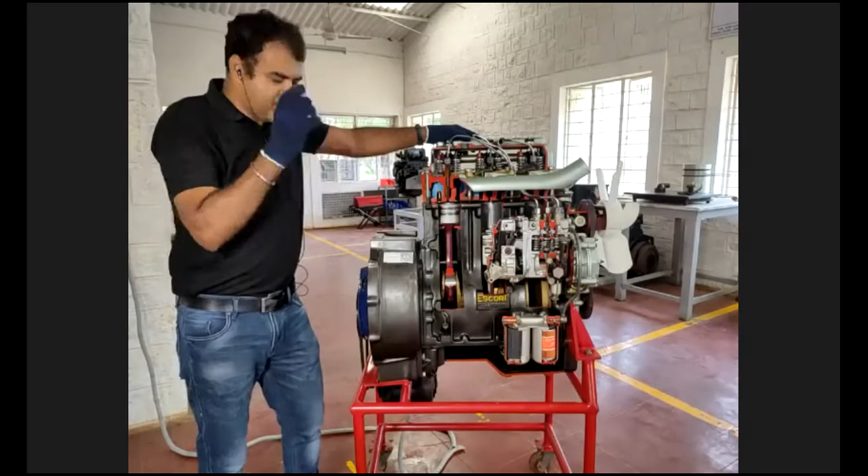Talking about this fuel injection system, this is direct injection, so this is a DI engine. Talking about the fuel system, this is inline fuel system, right? By cooling system, it is water cooled, right? By liner type, it has a wet liner system here. If we talk from top to bottom, there are different parts assembled here: cover, cylinder assembly, okay? Cylinder block is the crankcase area. Here the crankcase and cylinder are an integrated part. The bottom area we call the oil sump, right?

So at the same time, cooling of this engine is water cooled, as I already told. So have you heard the firing order of this engine? Okay, can anyone type in the chat box what is the firing order of this engine, a 3-cylinder engine, as per your knowledge?

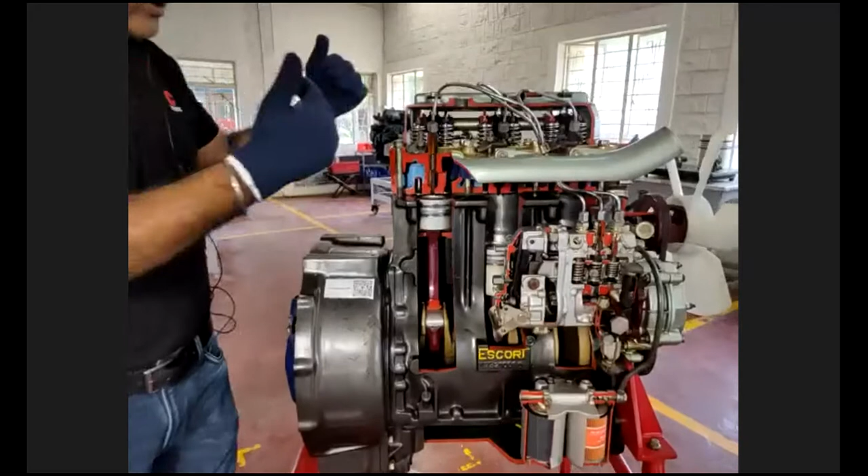We have started getting the responses, Umesh. Ankit has displayed his answer.

1342. Oh, this is a 3 cylinder engine. So there is one more chance for Ankit to correct himself, since this is a 3-cylinder engine. Then you can reply accordingly, Ankit. It's open to others as well, Badal, Sumit, and all our friends in the line. What is the firing order of this particular engine? You feel it's a 3-cylinder engine.

Yes, by seeing these nozzle injectors, you can identify this is a 3 cylinder. We got some more responses, Umesh. From Ankit Kumar, it is 123. From Pavita, it is 132. Okay, others also can try. It's for everyone, not only for 2 or 3 people. Surjit says 132, Vivek says 132. What about others? Be the quick finger, give your responses. Shankar Rajput says 132, Atul is telling it's 132. Thanks guys, thanks for the responses.

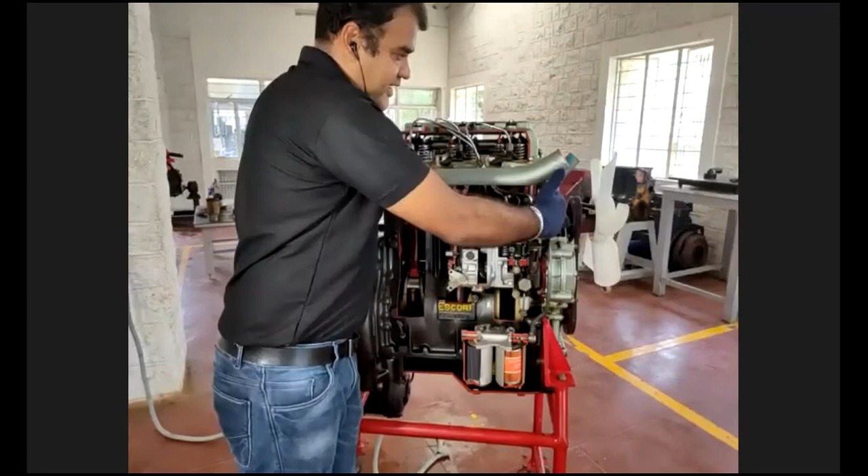Umesh, over to you. Okay, so normally a 3 cylinder engine has a 132 firing order; 321 is also there, and 123 also is there. But in front of us, this engine's firing order is 123. This is also available in the market, right? So we are calling this the 123 cylinder from the front side. As manufacturers, normally we say 123 from the front of the engine where the timing gears and radiator are located. From that side we call the serial number of the cylinders 1, 2, 3 like that, right?

Talking about the valve arrangement, each cylinder has 2 valves, inlet valve and exhaust valve. We have colored them here: the blue color indicates inlet and the red color indicates exhaust, right?

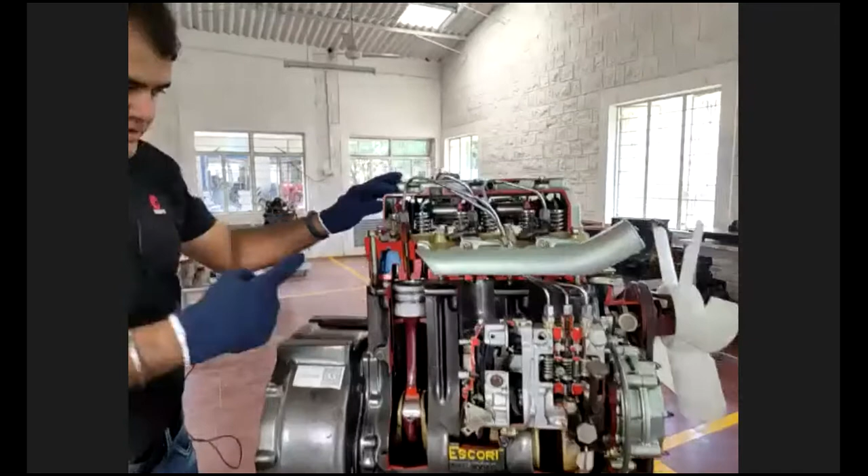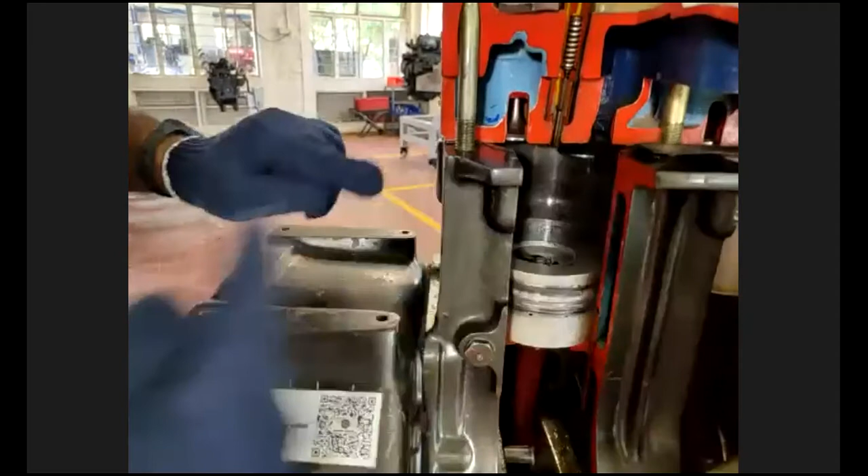So why is this valve clearance important? Can you show that valve unit closely, Umesh, so we can have an idea. This is the motorized one. You can see the valves here. Can you see it clearly? Yes, okay, so this is the 2 valve cylinder.

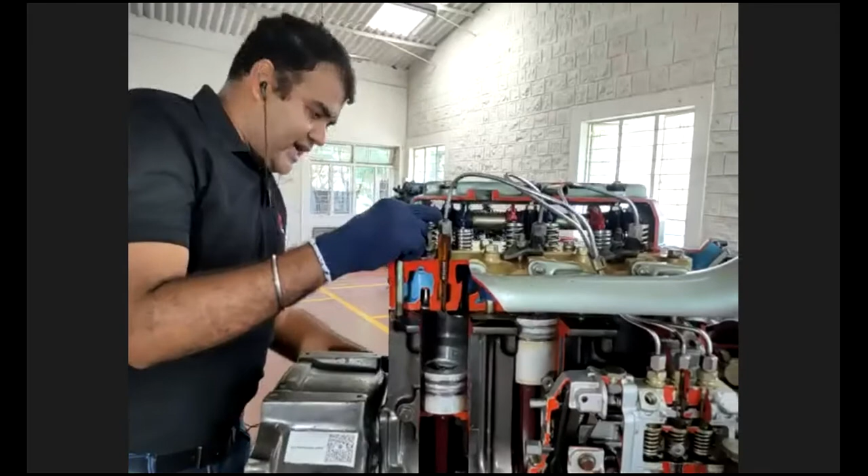Normally cylinders with 3 or 4 valves are also available, but this is 2 valves, one inlet and one exhaust. Talking about the valve mechanism, it involves the valves, valve cap, spring, rocker arm, rocker arm shaft, rocker, push rod, tappets, and cam lobe. Can we have a look at the other side? Yeah, sure.

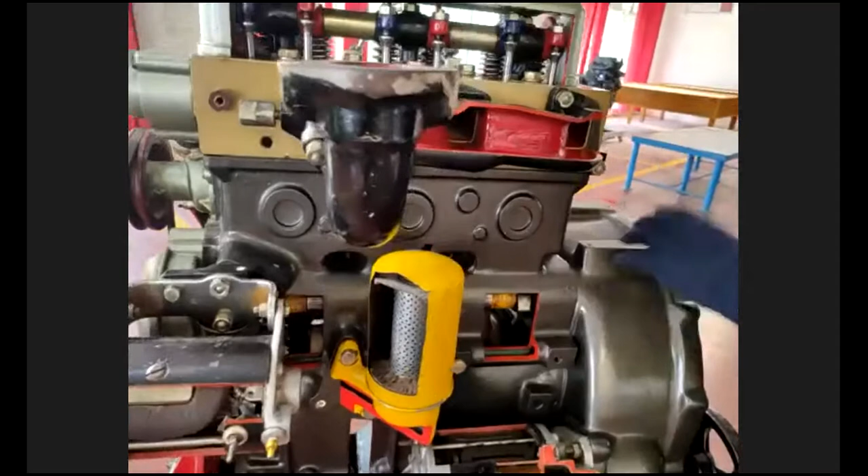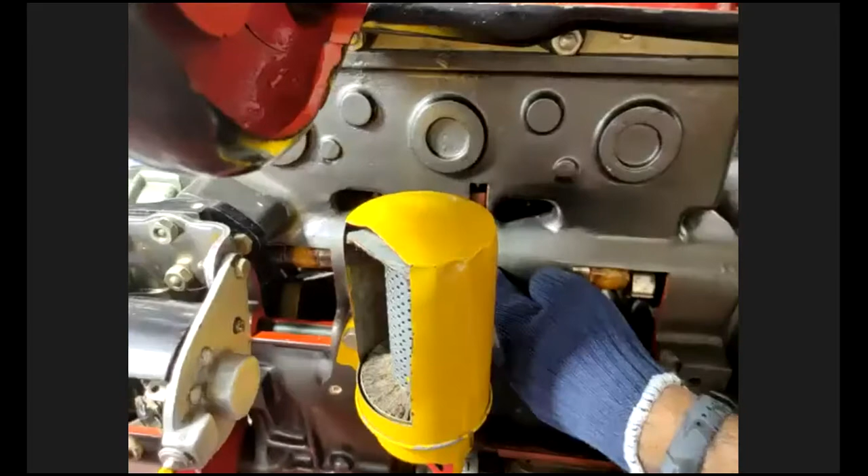There is the rocker arm, push rods, and cam. So about this here, rocker arm. Yes. Push rods. Okay, you can see here, tappets. The tappets. The cams. The tappets are mounted on the cam lobe. So based on the lobe, just a moment, Umesh.

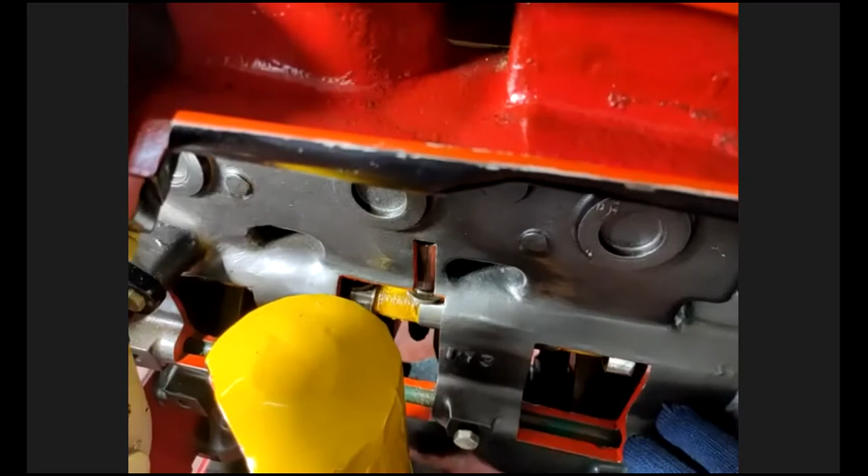I request others to go on mute. Ashish, Pratap, and others. Whenever you want to ask any query, you can ask in between also, or we can keep it for the Q&A session after this delivery. Others also to go on mute. There is one device, 4C766628. Please go on mute. Yes, Umesh. Thank you.

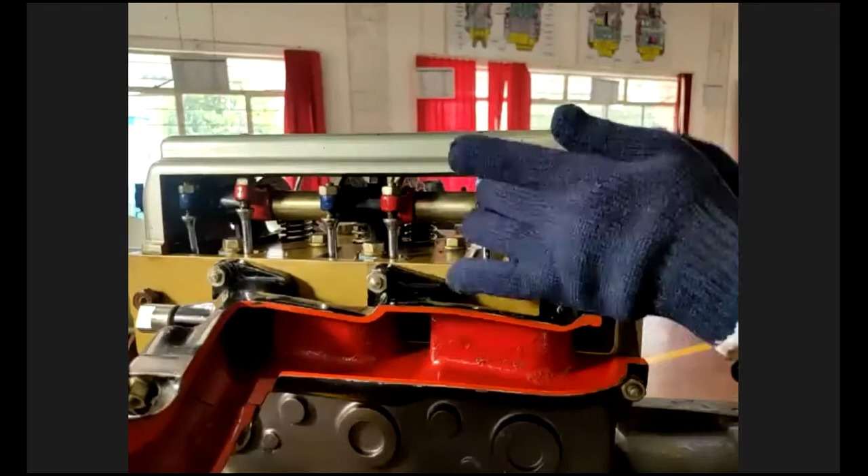So these are the different parts assembled in this mechanism. The tappet is a different part and push rod is a different part, right? Then rocker arm is a different part. So why do we need to do the tappet clearance here?

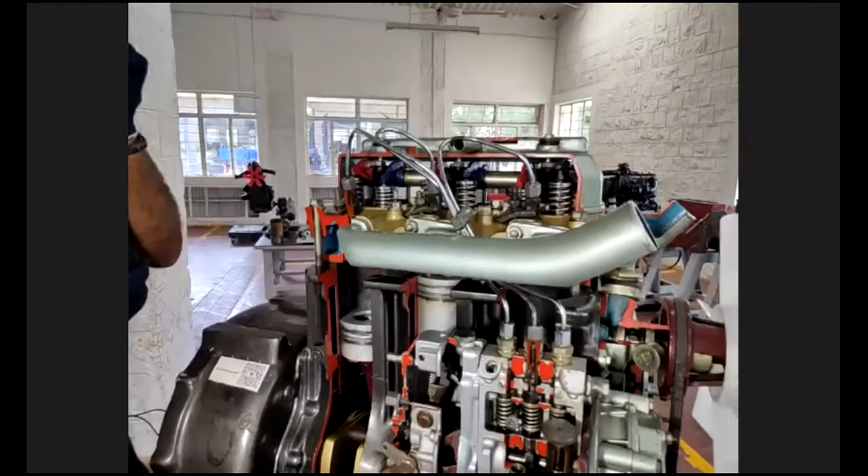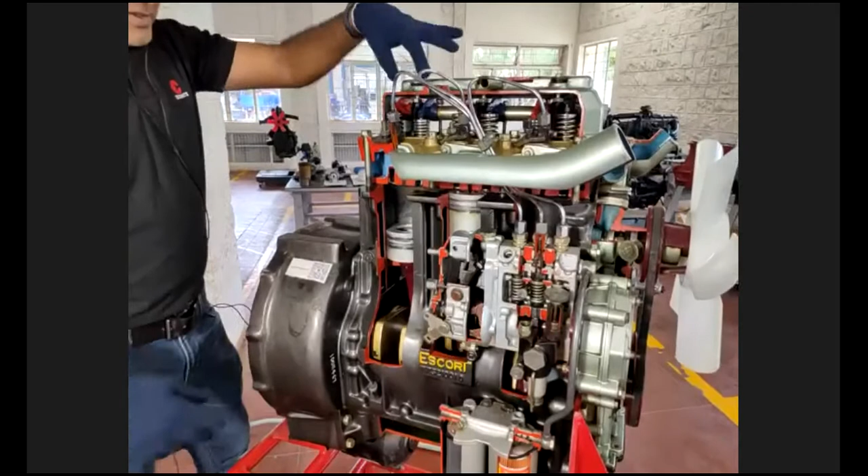So the clearance is very essential for this engine to achieve better performance, better mileage, and better life, right? So why do we need to maintain this gap? Because these valves are exposed to the combustion chamber. Because of the high combustion chamber heat, the valve expansion takes place. Once expansion takes place, what will happen?

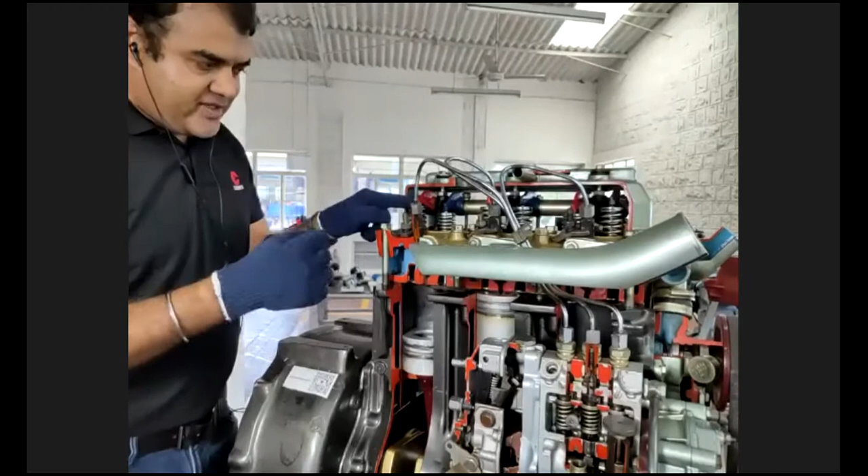The gap between the valve tip and the rocker arm will get closed, so that it will be continuously engaged on the valve tip. As a result, the valve seating position will be affected, and ultimately it gives poor performance of the engine. To maintain that, we need to keep the valve clearance gap here. To adjust that, we need a feeler gauge. We'll do a practical session on the practical engine, right?

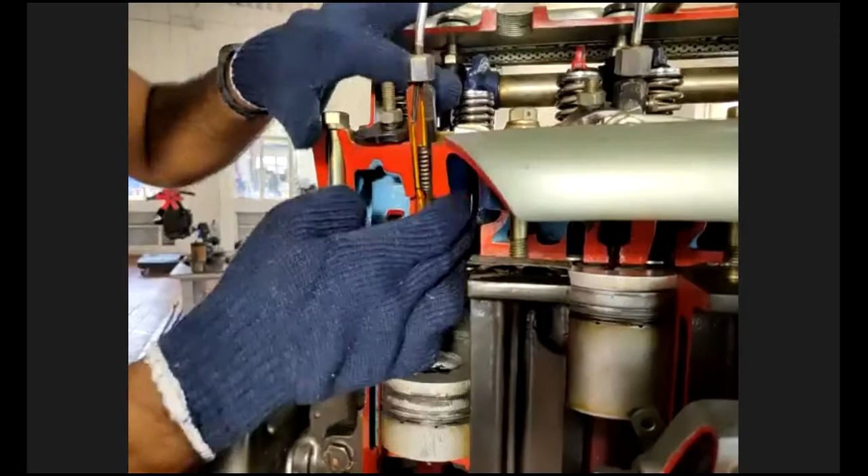You can see the valve mechanisms here. Here you can see the valve seat. So what will happen? Because of the temperature, the valve expansion takes place, so the gap is a must in between the rocker and valve, so that the seating will take place properly. That's the main reason we need to provide the valve clearance here, which is called valve tappet clearance.

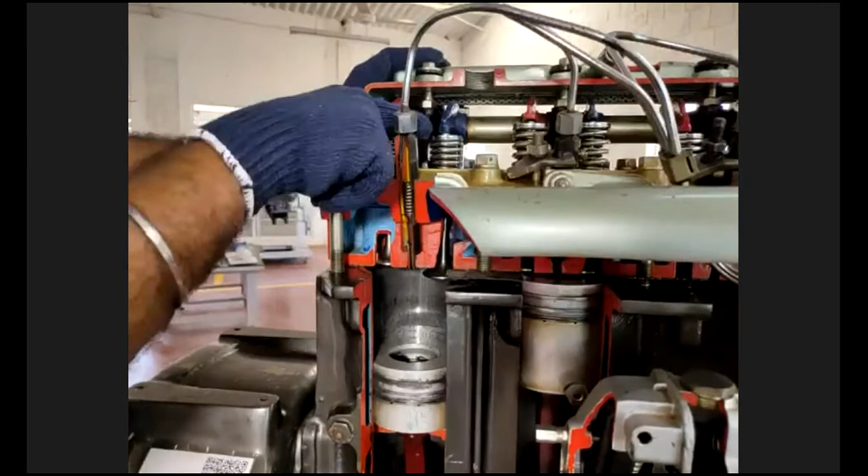So here is the valve tip, you can see. That is the rocker arm, the painted one. And at the tip of the valve, between these two locations, we have to maintain the clearance. Right from a new engine being assembled at the factory level, they will maintain this. The rocker arm receives the motion from the push rod.

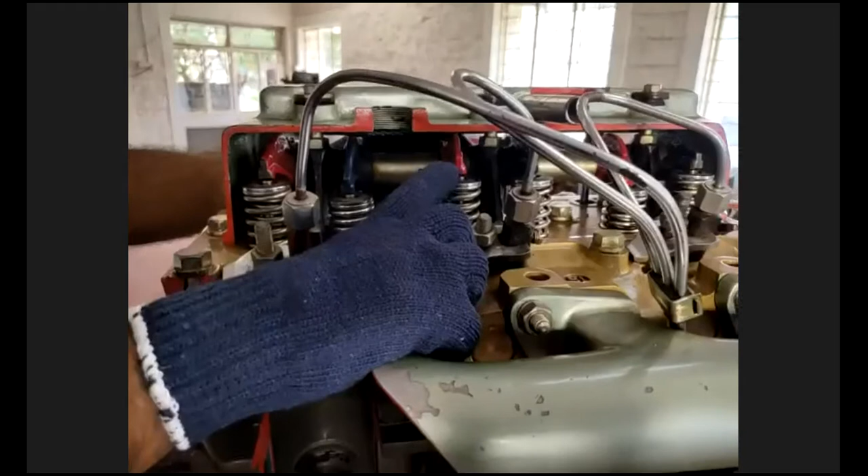It will push the valve against the spring pressure. Due to spring pressure, the valve will automatically get closed. So this is the operation of the mechanism. Otherwise, the valve timing diagram will get disturbed, and ultimately high fuel consumption, poor pickup, and overheating will take place in the engine.

So this is the explanation of the engine on the cut model. Now we'll go to the actual engine and demonstrate how to do the settings there. We are ready. Just a minute, we're moving to the engine. Can you see? Yes. Thank you.

So in front of us is a 4-cylinder engine. In this engine, on the right side and left side, there are manifolds. This is the intake manifold, this is the exhaust manifold. By seeing this, I have one question: which type of air flow is it? Can anyone please write in the chat box?

Based on the inlet air and exhaust air flow, which type of airflow is it? The construction of the inlet manifold and exhaust manifold is shown to you. Could you tell which type of air and exhaust flow is available in this engine?

Any messages, please update, Anand. Yeah, sure, Umesh. Make an attempt. It is not necessary that we should give a right answer every time. Participate, participate. Very good. Nilesh and Aditya Gupta have responded. It's linear. Linear. What about others? What do you feel?

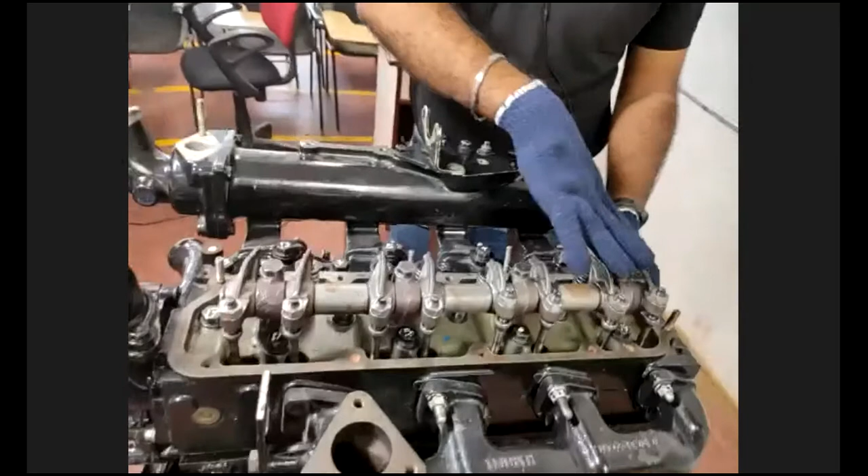Take. So here you can see the valve mechanism. There are a total of 8 valves, since it is a 4-cylinder engine: 4 inlet valves, 4 exhaust valves. You can see, right? So can you tell the part which you have just taken out? This is the cover, tappet cover. That's a tappet cover. Great. So this is covered by one cover, the tappet cover. It is made of cast iron or maybe sheet metal.

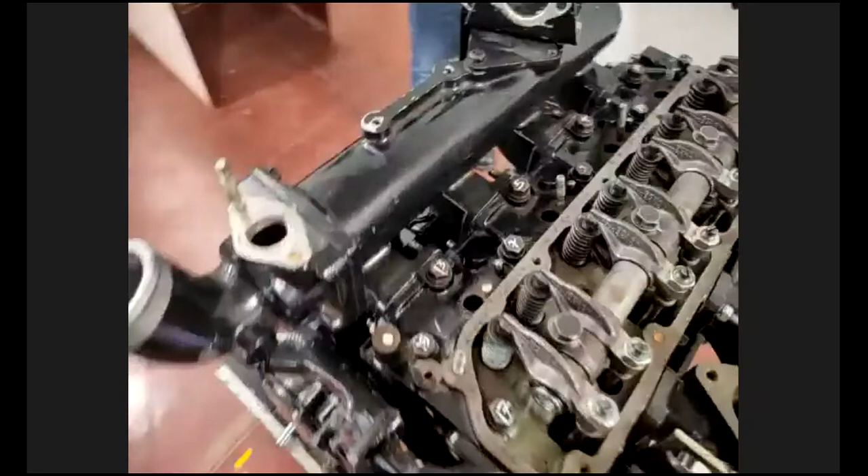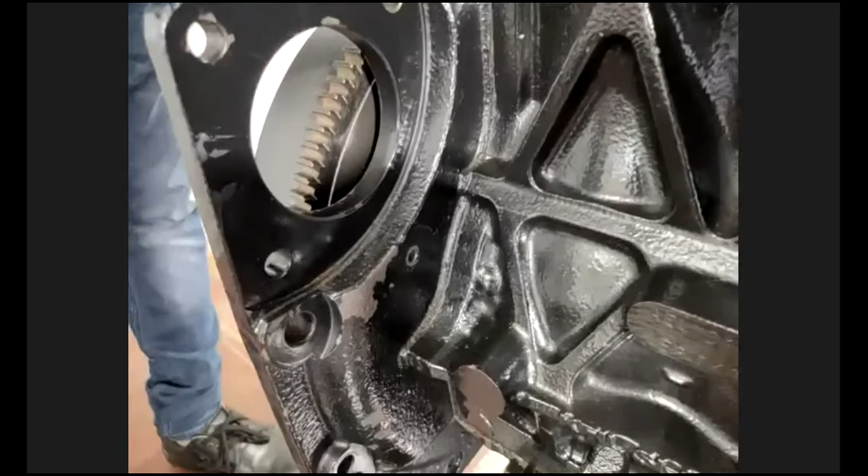Okay, in the flywheel there is a hole. There are 2 holes normally. One is the BTDC position and one is the TDC position. TDC means 0: the piston is in the 0 degree position. BTDC means before TDC, the fuel injection timing, used while removing and refitting the fuel injection pump and setting the timing. So we need to set that BTDC mark.

So now we are going to do the valve clearance setting. There are different techniques. We'll explain. First we'll insert this pin into the TDC mark hole. Yeah, can you please rotate the engine? So whenever we rotate the engine, yes Anna.

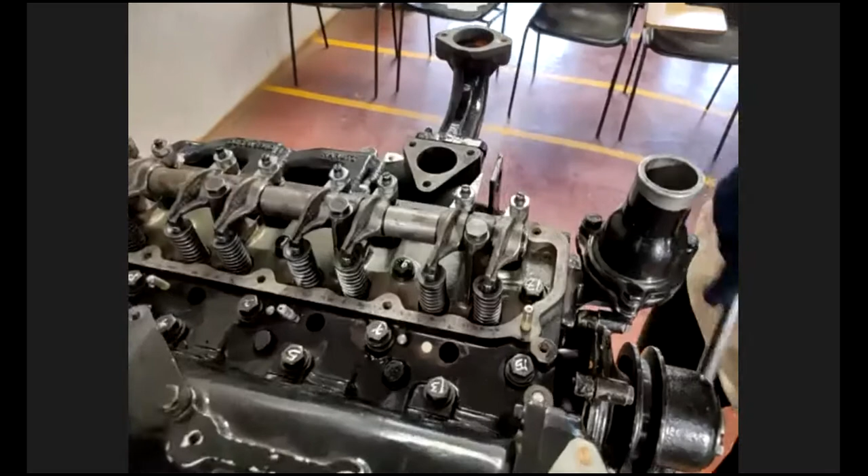But to confirm that, just rotate the engine. Just clockwise, anti-clockwise. Just come back. You can see, there is no dancing position here. That means slight oscillation, rotation of the crankshaft, to and fro movement.

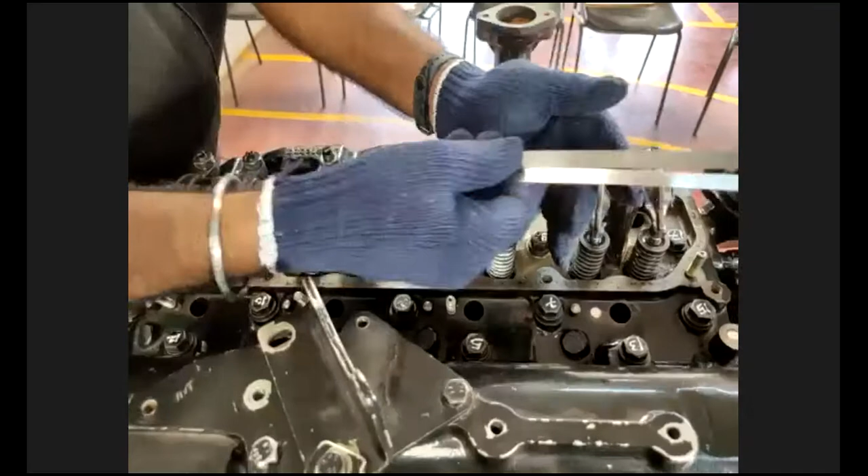Great. Now the engine is in the end of compression stroke. Rotate the engine. So we need to fix the hole. So to do the tappet setting, we need a few tools. So the first one, identify this gauge's name. Got the response from Nilesh: feeler gauge. Great, feeler gauge, exactly. To measure the small distances, we need this gauge.

Normally, based on the manufacturers, they give the clearance for the inlet and the exhaust. In this engine, the clearance for the inlet valve is 0.30 millimeter, or in thou, 12 thou. For the exhaust valve, the clearance is 0.40 millimeter, or 16 thou. It will vary manufacturer to manufacturer. Sometimes it may be the same, sometimes it will vary. Sometimes the clearance is more in some engines. Here the difference between inlet and exhaust valve is 0.10 millimeter.

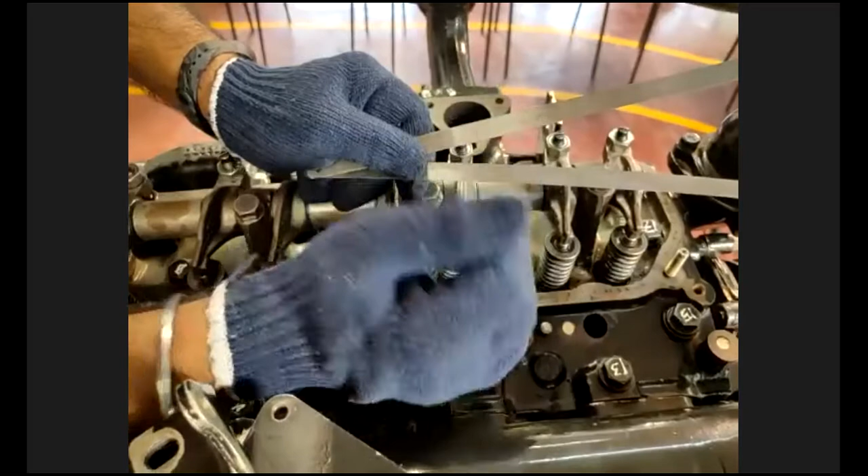Why the difference? Because the exhaust valve is normally exposed to a higher temperature area compared to intake. When exposed to high temperature, the expansion is also higher. So that's the reason the clearance is higher compared to the intake one.

Right? So we need to do the tappet clearance right now. So there is a different procedure here. 4 valves we can set at a time, right? So first, in the TDC position, we are able to set this first one, second, then third, then 6. Okay, so these are the valves we are able to set. For the remaining, we need to do another round. So we'll do it now: 1 intake, 2, 3, and 6, because these are the valves in the closed condition now.

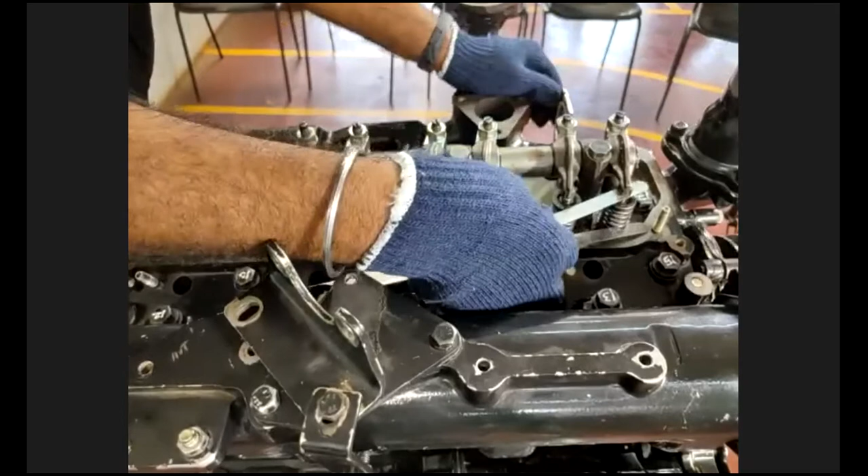So 1, 2, 3, 6 as a first round, you can do the clearance setting. So how to do the setting? Okay, just keep this gauge in between the valve tip and the rocker arm face. Then there is a separate adjusting screw here, which is directly in contact with the push rod. This is a threaded screw. Once you tighten or loosen the screw, this position will vary.

Can you show the variation? Yeah, rotate, loosen. Is there any movement in the rocker arm? Yeah, you can see now. It is loosened, more clearance is there. I rotate it anticlockwise. Now I rotate it clockwise. So the screw is for adjusting the clearance, and the nut retains the same position. That's why it's called a lock nut.

So while adjusting, you should get the feel. From the bottom and the top, the gauge must rub. It should not be too tight. Okay, now it's okay. In this position, lock the nut. At the same time, we need to do the exhaust one. Yeah, lock it. Now the exhaust valve is done. Next is the third valve. The third valve is intake. We need to keep 0.30 millimeter clearance.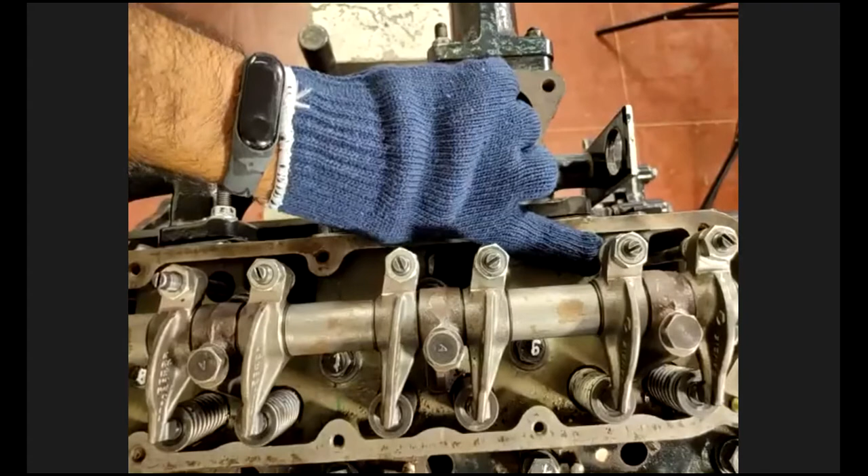How to confirm? Try to rotate the push rods of the first cylinder by finger. It won't rotate. The valve is in slightly opened condition, so it's not rotating by hand. So we can confirm the first piston is at exhaust stroke TDC, so we can do the valve clearance of the remaining 4 valves. 1, 2, 3, 6 is done.

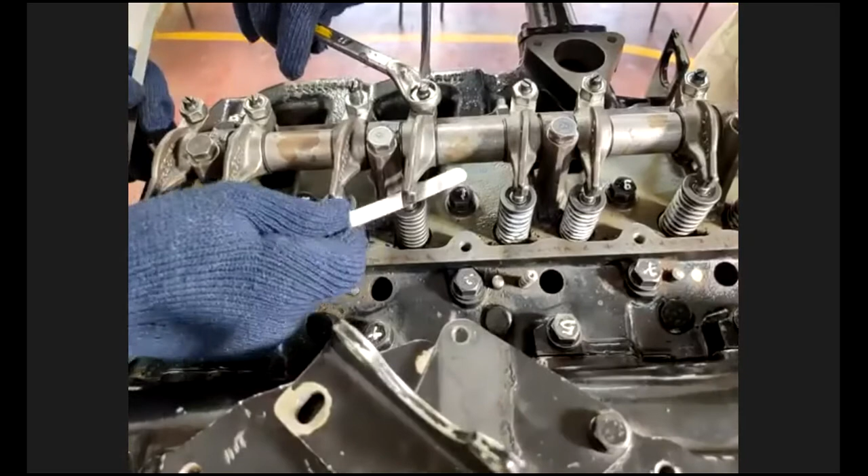Then 7, the inlet. Done, 7 done. Finally, valve number 8, exhaust valve. The clearance is 0.40 millimeter. Loose. Okay. So now the tappet clearance has been done for this engine. In the first round we did 4 valves, and in the second round the remaining 4 valves. This is one method, as per the manufacturer's recommendation.

The other method is to keep each piston in its cylinder at TDC position. Check that it is not in the valve overlap position, then adjust each one at TDC. That is also a method. Here we used the manufacturer's recommendation for this particular engine. It is easy and we have done it quickly. Thanks, Umesh. The second method Umesh described is also called the firing order method.

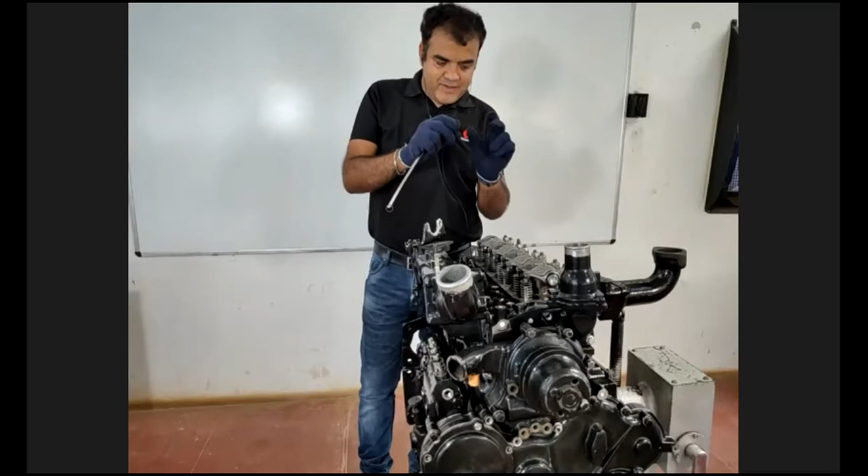At the same time, on the camshaft, the lobe positions are different. Whenever the lobe falls on the tappet, it will try to push the valve, right? So at that time we cannot adjust the tappet clearance. So 30% of the area on the cam is the lobe, the remaining is the base circle. So if the base circle touches the tappets, at that time we can adjust the valve clearance. So irrespective of the valve opening, whatever free valves we find, we are able to adjust. So that is the procedure we follow for this particular engine.

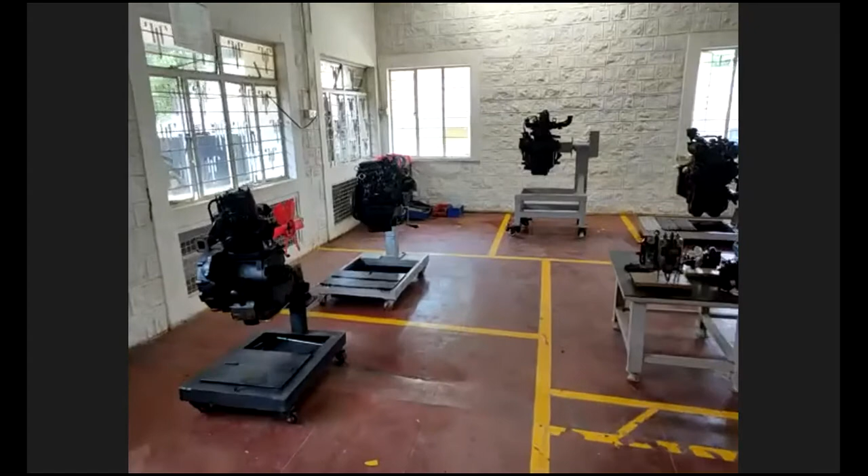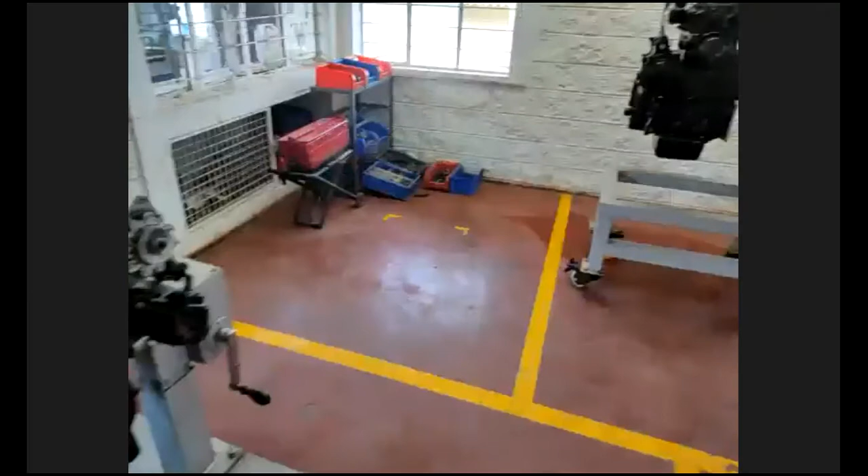Can you show the other side? Yes, so in our engine workshop there are different engines, the HP range starting from 12 HP to 90 HP. This is a smaller HP range engine, these are 12 HP, single cylinder engine. Come to this one, it's a very compact engine. Here is the highest power engine we are having, this is 90 HP, especially used for export models.

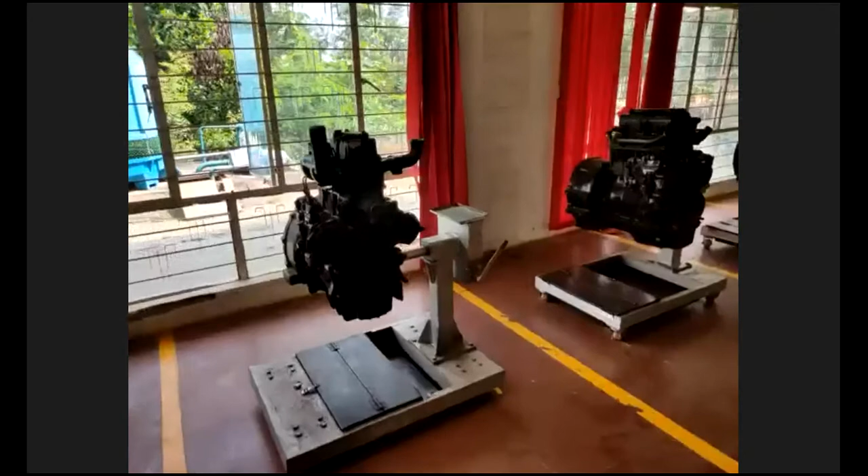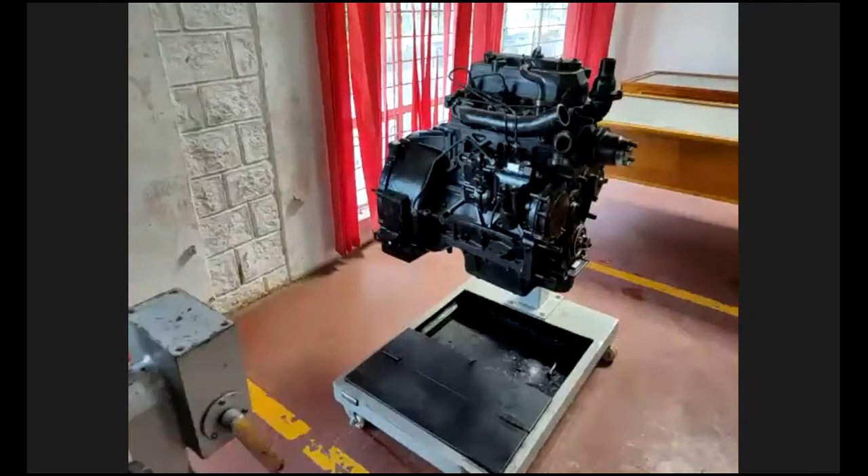We have an FIP calibration machine in our workshop. The remaining 30 HP, 40 HP you can see here. We're having single cylinder, 2-cylinder, 3-cylinder, 4-cylinder, and 4-cylinder with turbocharger engines. We have 4-cylinder naturally aspirated and turbocharger with inline fuel system, as well as CRDI tractors to show the common rail direct injection technology in the engines.

These are the internal components to brief how it is working, like the filter functions. There are small cut sections showing the engine parts. This is about our engine workshop.

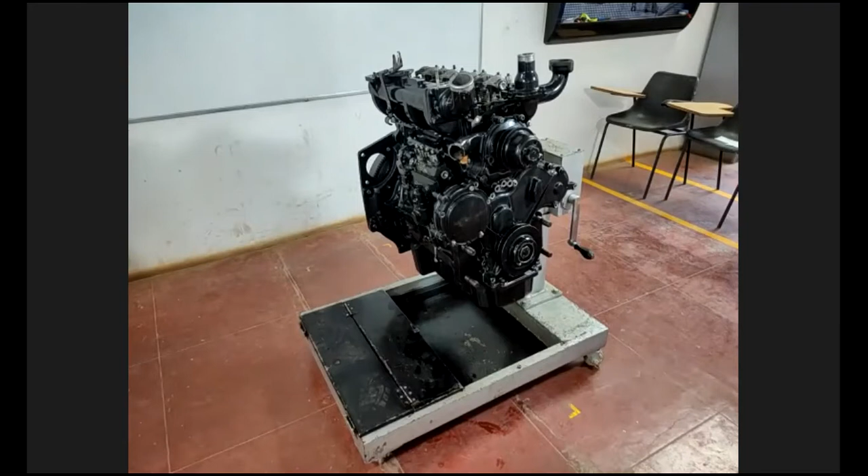What you are seeing is the transmission workshop. Can you rotate and tilt it towards the gearbox aggregate units? These are the transmission units of different tractors, right from 12 horsepower to 90 horsepower of PowerTrac and Farmtrac brand transmission circuits here. The board you are seeing is a special tool board.

This is one part of the transmission workshop, whereas on another side you will have another set of transmission units, gearbox, rear axle units of different types of tractors, right from 8+2 gearbox, 9+3 gearbox, 16+4 speed gearbox, 12 forward and 12 reverse speed gearbox. This morning we had a session for the Bangladesh team, our distributor at Bangladesh. They had a practical understanding of how to open a gearbox, understanding the working principle, setting, and troubleshooting.

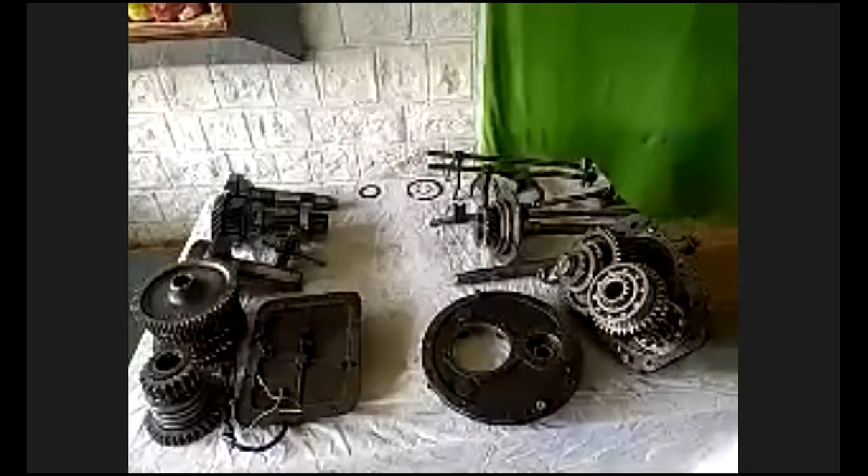Shall we have a look, okay, this was the briefing done to them in the morning session. You can see the background screen for the video live classes. We normally use this screen.

Umesh, shall we switch it to the hydraulic workshop? The device name you can find is hydraulic. Yeah, I have seen it.

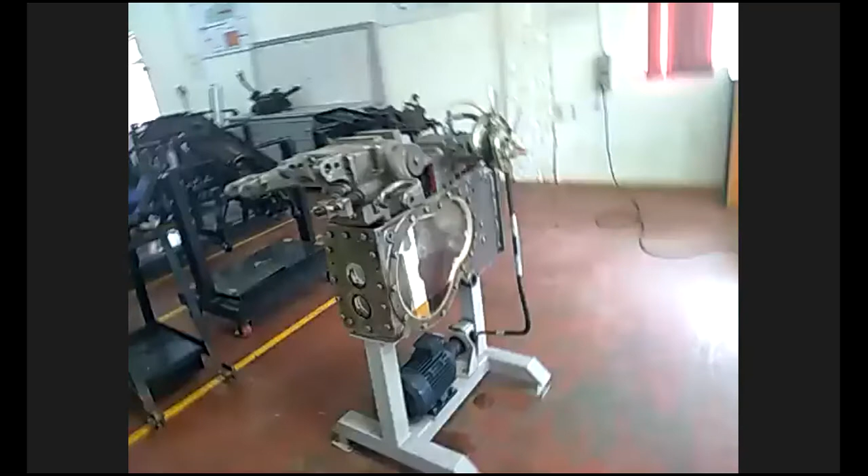Our campus has the hydraulic workshop. I can spot it but I'm not able to pin it or spotlight it.

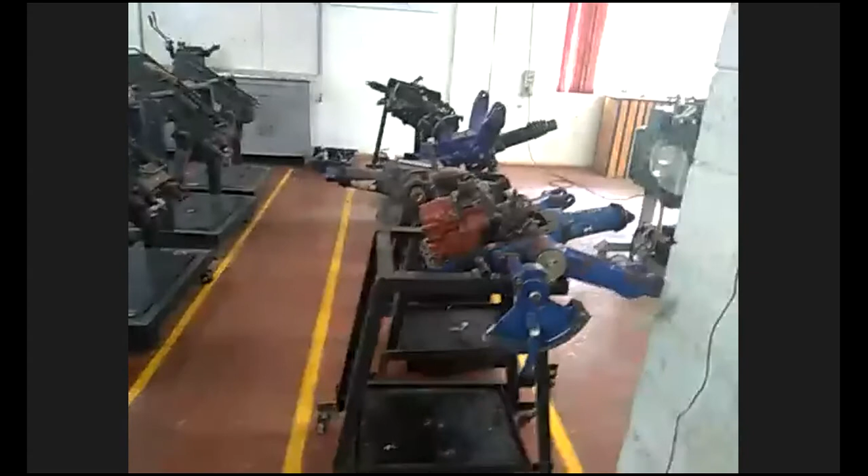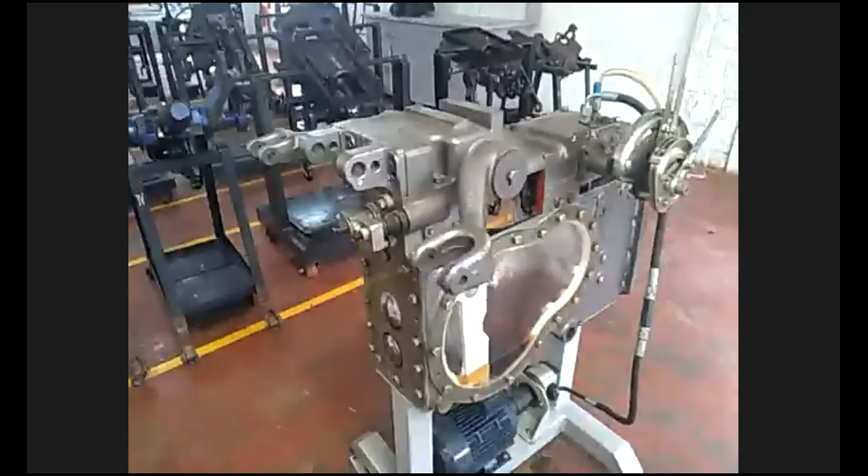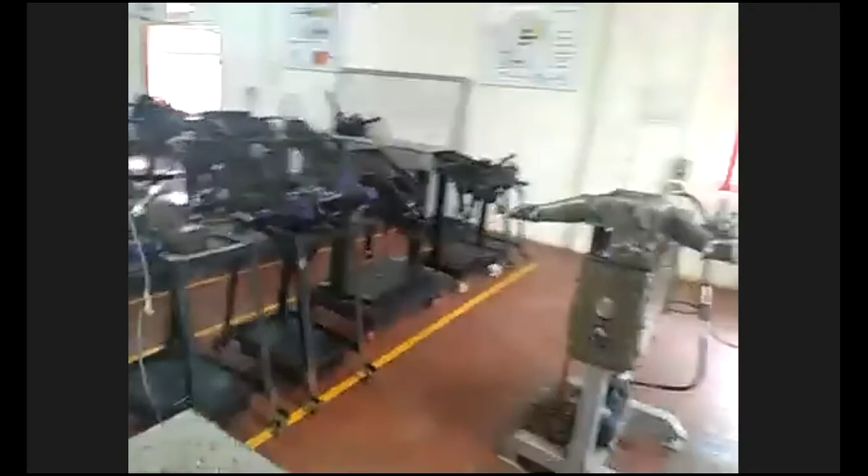Okay, great. So this is the hydraulic workshop inside view. These are the hydraulic working models showing how oil flow happens inside the hydraulic system. That section has working models to understand the hydraulic functions. Similarly, in the background you can see hydraulics ranging from, as we discussed, low HP to 90 HP, different tractors, different makes. Some of the models use our own Escorts hydraulics, some we get from other suppliers.

One beauty of the Escorts product range is that we have all types of hydraulics. For example, in rear axle there are 4 types of technologies available, and we are the only one who has all 4 types of technologies used in our tractors.

Anand, there is another device we kept at the agriculture implements yard, you can show that. So this is the internal linkages of the hydraulic system.

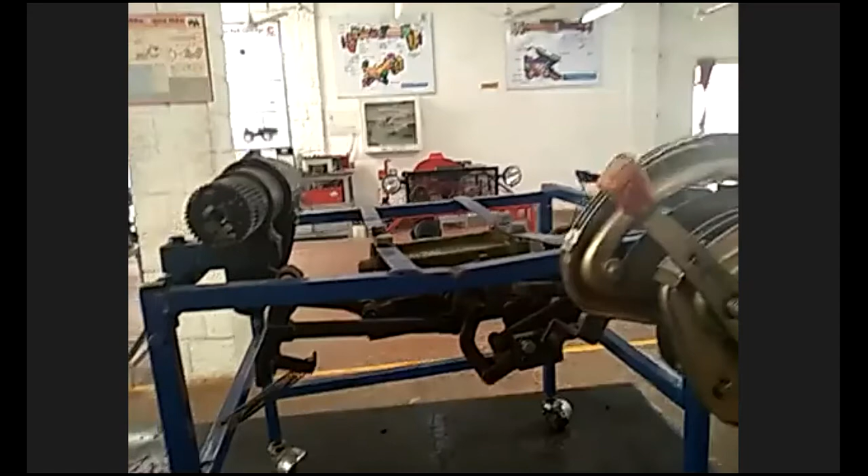In the background you can see the 4-wheel drive units and electrical section, just behind this.

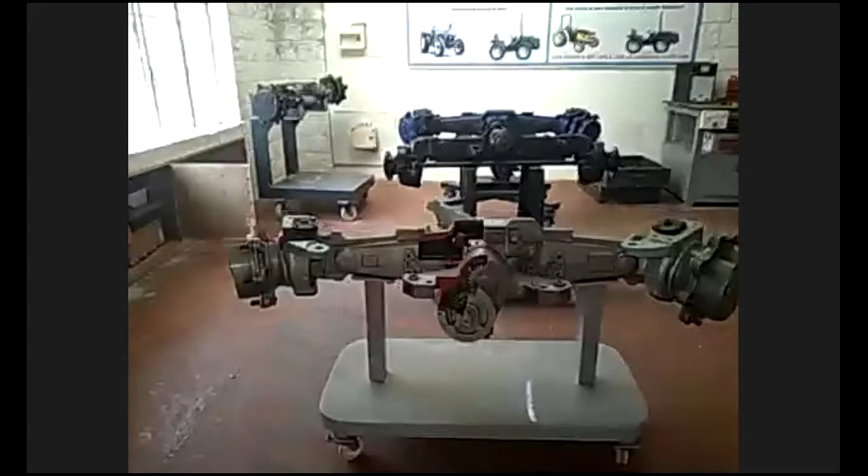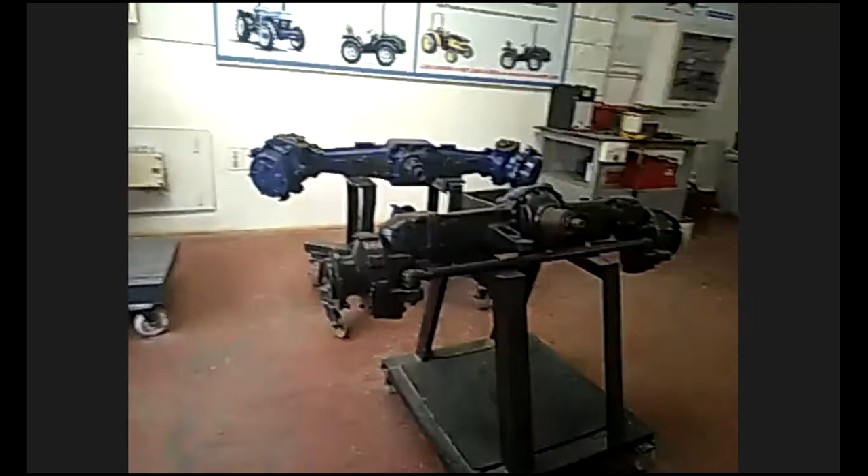Can you show the 4-wheel drive section area? Again, 4-wheel drive right from 26 HP to 90 HP tractor, and its cut section, so it will be easy for people to understand the working principle. There are different types of 4-wheel drives also, it's not the same design everywhere. There's stub type, portal housing type - different types of it.

This is the axle used in 90 horsepower tractors. So in our sessions, based on the audience and requirement, we will have detailed dismantling, assembling, and discussion sessions on each aggregate.

You can have a look. Thanks, so shall I move to agriculture implements? Yeah, sure, agriculture implement device name - Regan, could you pin that agriculture implements device? Yes sir, one minute, yes please.

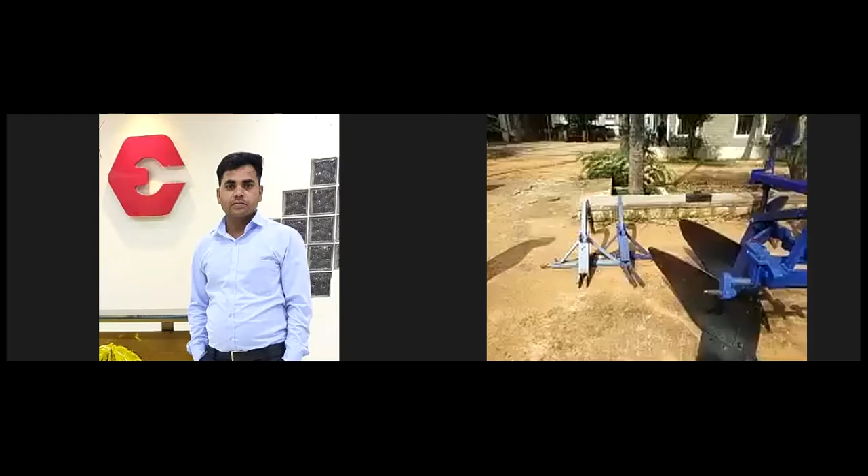This is the implement yard. We have right from traditional conventional implements to advanced implements, right from the chisel plow, reversible plow. Can you show it in one glance from this view? No need to walk behind that, show it in one glance. Just rotate it. So on this side you will find all the different types of plows, right from the poly disc plow and MB plow. On that side are different types of cultivators.

So these are the things which you have seen so far, which is our infrastructure - it's one part of the infrastructure. And these are about the equipment, aggregates and the equipments.

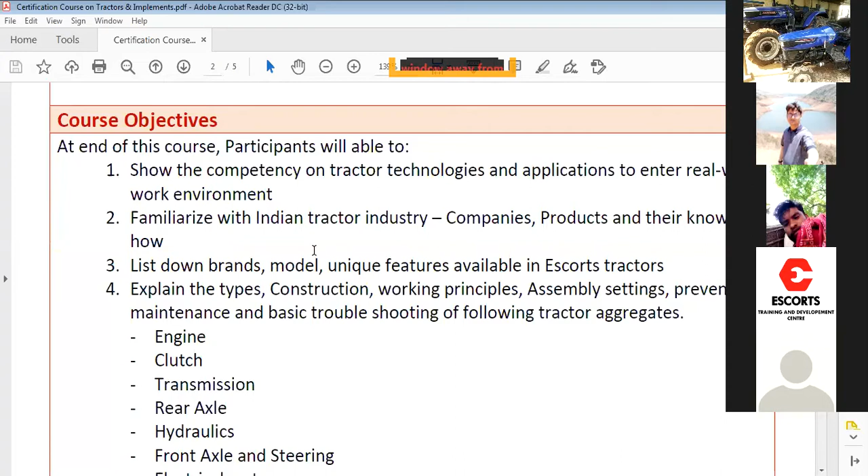To meet the primary objective, we have bifurcated the other objectives we are going to meet by the end of this course. You will be familiarized with the Indian tractor industry, what companies are available, what different products and models are available, and their know-how. Similarly, for the Escorts brand, you will come to know the unique features available across the different models in the Escorts range of tractors.

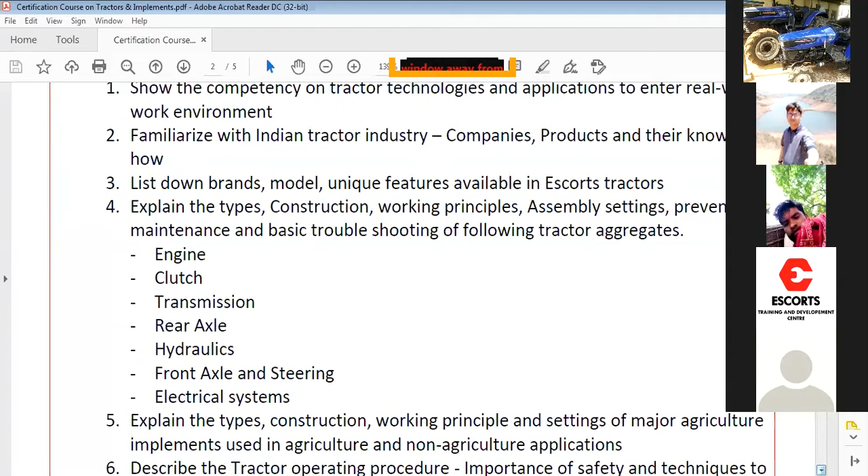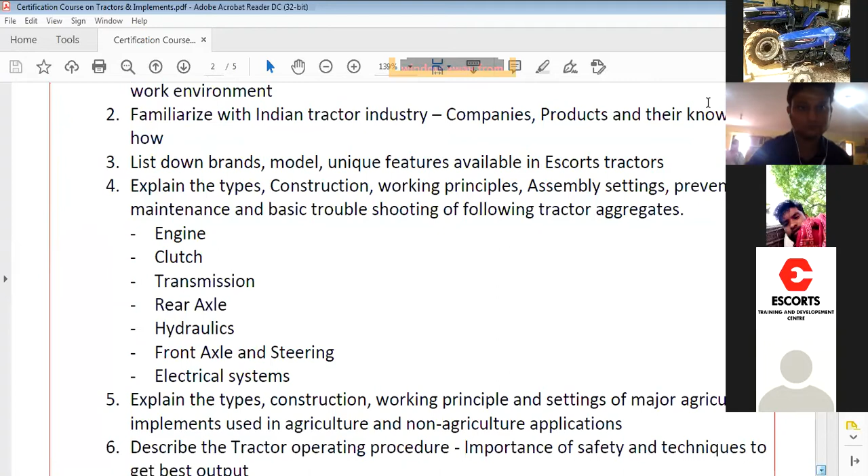You should be able to explain the types, construction, working principle, assembly settings, preventive maintenance, and basic troubleshooting procedure of the engine, clutch, transmission, rear axle, hydraulic, front axle, and electrical systems available in a tractor.

Similarly, you will be able to explain the types, construction, working principle, and settings of major agriculture implements used in agriculture as well as non-agriculture applications.

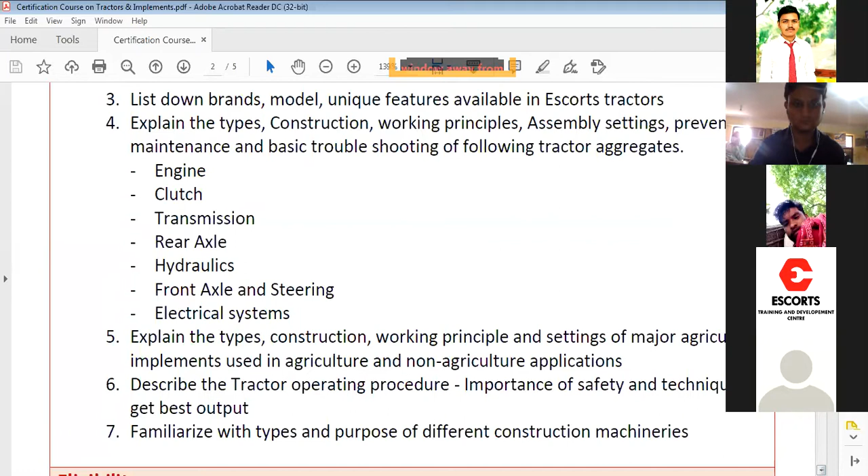You will be able to describe the key points in tractor operations, tractor operating procedures. You will also be familiarized with the types and purpose of different construction machineries.

Since construction machinery is one of our divisions, the training center of the construction machinery is located inside our campus as well, so that we can explain different construction machineries as part of this course.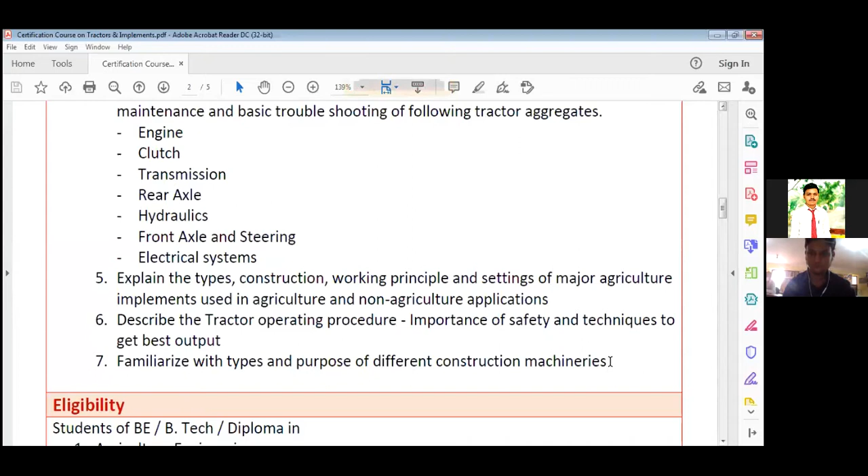Eligibility to attend this course: engineering students, particularly in these three branches - BE, BTech, or diploma students. That's the eligibility. Batch size we are trying to keep up to 50 in range.

It's a 4-week course, and weekly two modes will be available. One is the live webinar session, similar to the session we are interacting in now. It's instructor-led, where the participant will have the opportunity to interact and get clarification.

The main differentiator of our program is we will explain things from the workshop, practically showing the component and explaining. The support of PPT presentation will be less - it will be there, but less - so participants experience the practical functioning of the tractor, its aggregates, and implements in live virtual sessions like this. There will be 14 sessions in this 4-week course.

There is another mode also - the online classroom module, which will be app-based. We'll be providing a special app, mainly meant for Escorts employees, whereas the app provision will be given to participants so they can access course materials, course content, and evaluations in the online modules.

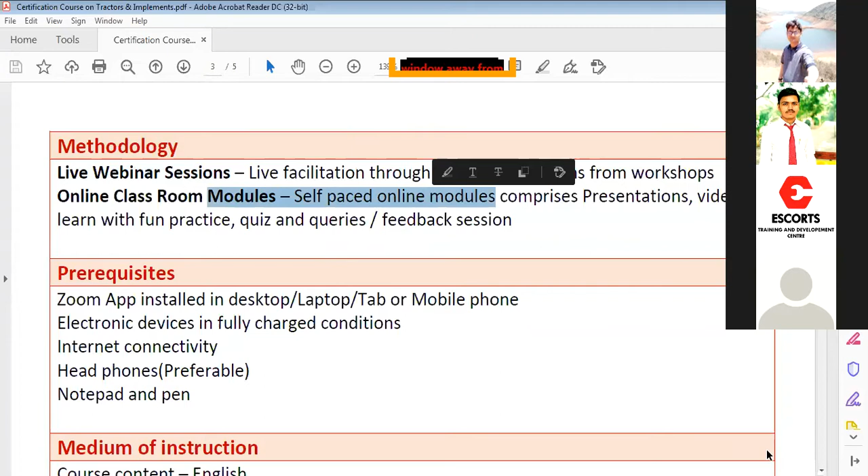I have briefed it - same thing. It's live facilitation, a self-paced online module. There are two modes. We'll be using the Zoom app for live webinars.

The medium of instruction is English. In case students prefer some other language during course interaction, they are okay with that, as our team can interact in different Indian languages.

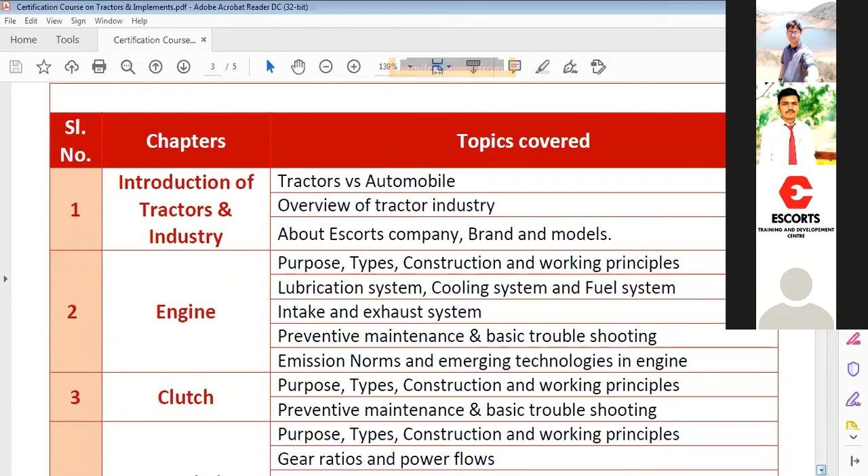So this is the course content outline. You can see there is a link between the objectives which I have shown. To meet that objective, we have these topics. Let's say introduction of tractor industry, engine, clutch. There we will be studying everything: type, purpose, construction, working principle, dismantling, assembly procedures.